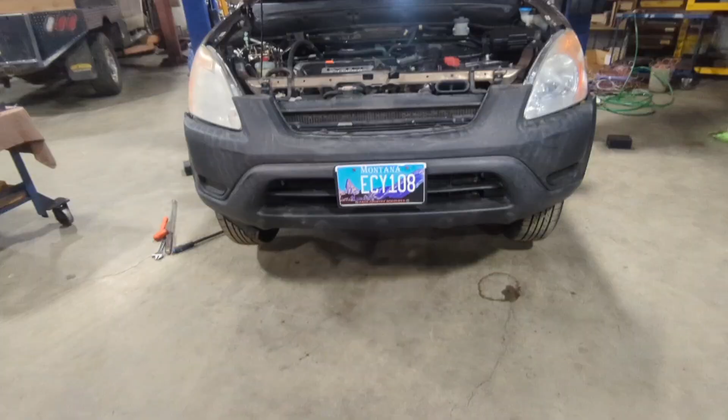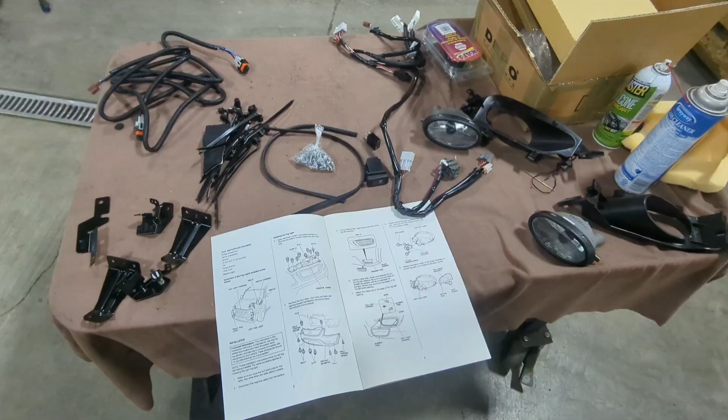Here we have all of the components of the kit ready to go on. This is a Depo kit made to duplicate the aftermarket or the OEM dealer part number. So I popped the bumper off.

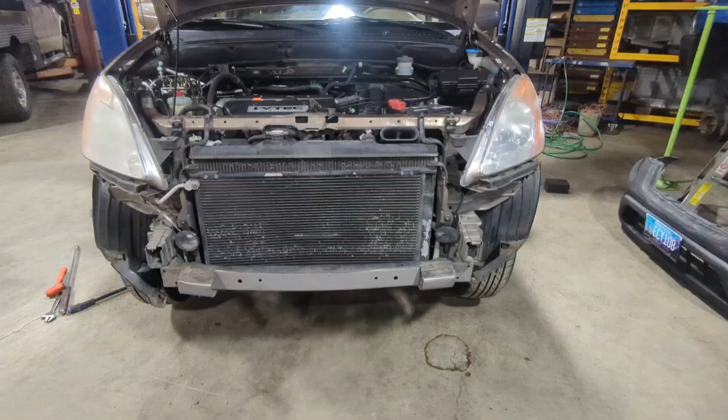There's many videos on how to pull the grill and bumper and all that off. Alright, so here's the piece that I cut out. As you can see, there's 4 tabs around them. The instructions tell you to use a utility knife, and I did. And then I took a Dremel tool and a burr bit and cleaned up all of the edges.

And then I took a micro torch and just heated up the little bits of plastic so that I could wipe them off with my finger, and it essentially sands it perfectly smooth because I just had little bits of the burrs left over, and it made for a nice clean hole. And there's what the back side of it looks like once that's all done.

Nice clean smooth hole cut perfectly to the opening that I can now mount the bracket that goes here and then here for it, and we'll work on installing the fog lights.

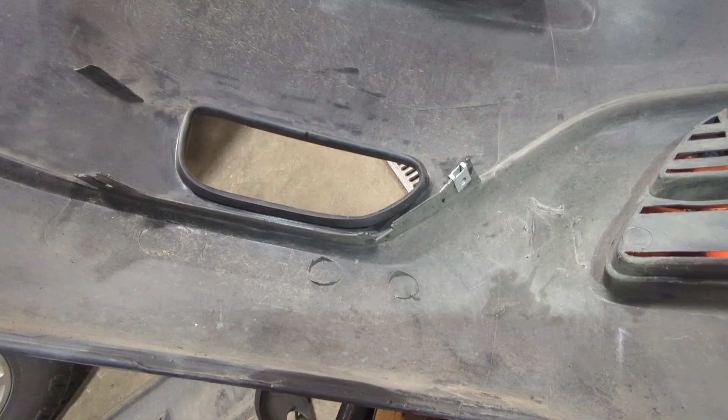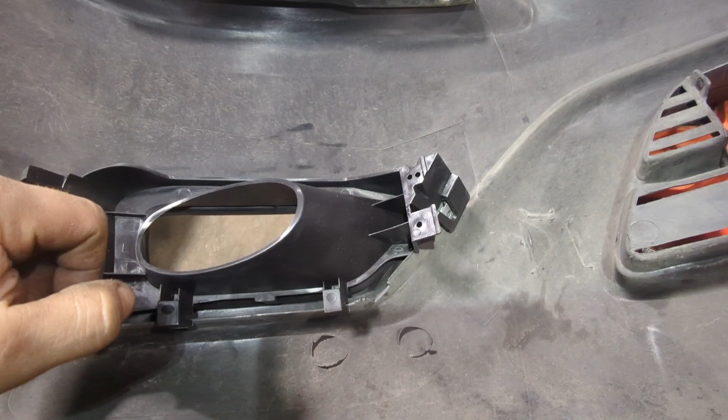Alright, I've got one captured nut there, I've got another one there, and then I've got a captured screw nut, and then this slides in about like so. Got a bolt that goes there, screw that goes in there, rests against here, sets there, and then the fog light's going to actually bolt here, here, and here.

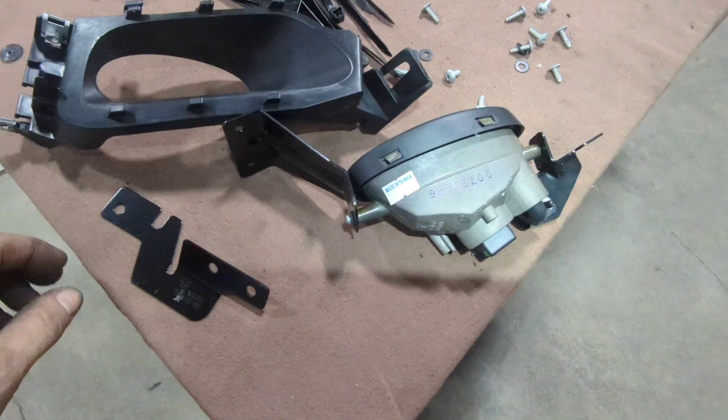This other side's the same way. Those are the bolts I'm using. And if we come over here, you can see I've assembled the fog light with that bracket, that adjuster, and that will set in on the opposite side like this. So, mounts there, mounts there.

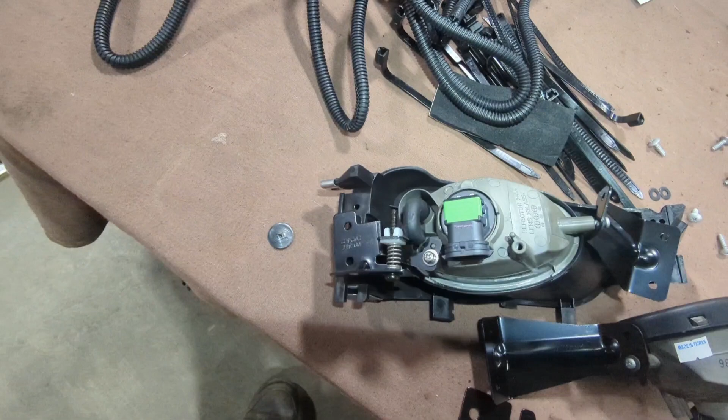Hopefully that gives some clarification. I know it took me a while to figure out what the heck the directions were saying, but I'm excited for these. Hopefully you guys don't make the same mistake I did, which is there's a rubber washer here that needs to have this metal washer on the outside.

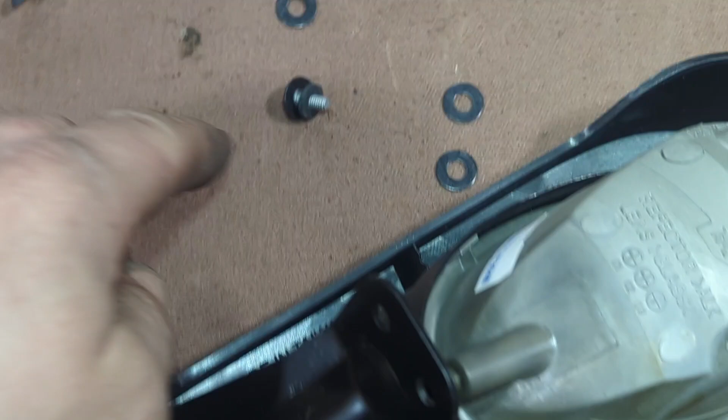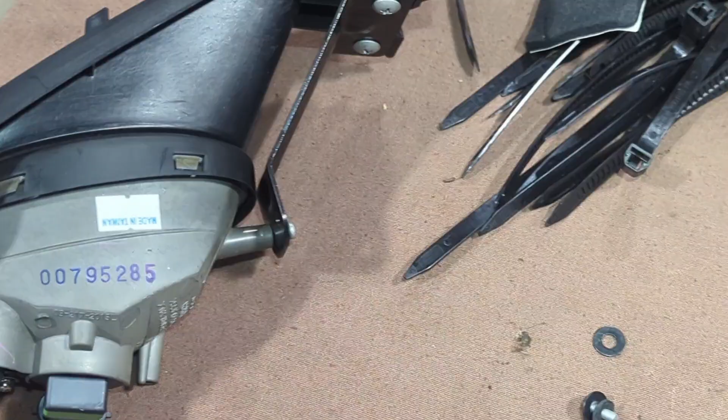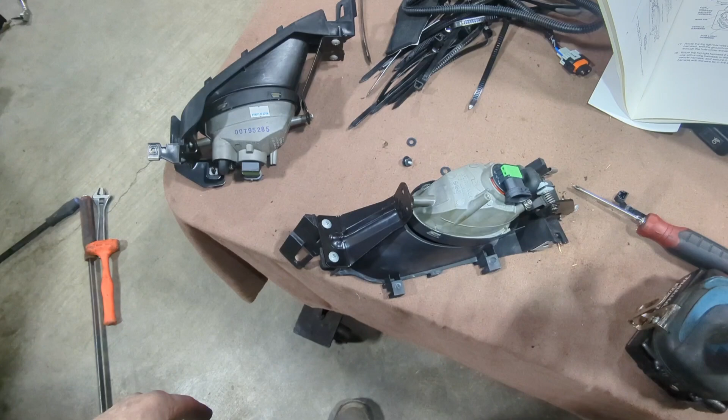It goes right here. There's one that'll focus right there on each side of the light. So there's one right there and one right there. So I was curious what those 4 washers were for. I figured it out when I went to tighten the bolts. But I did wait till the end to tighten all 4 of these on each light and then realized my mistake. Hopefully that clears that up, because it didn't say it in these instructions, despite how good they are.

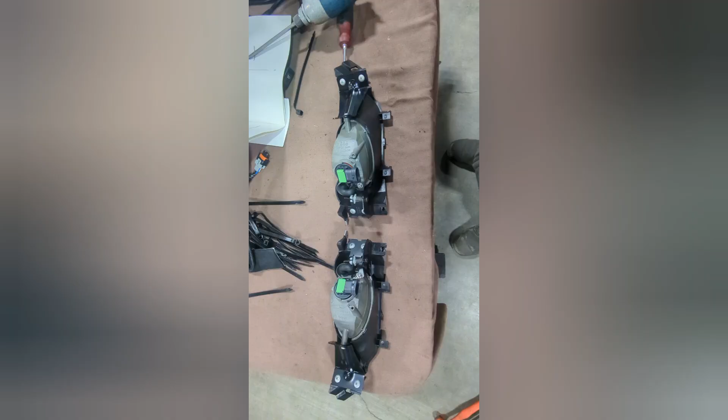And I will post pictures at the end as to what all was in the instructions. Alright, here's what the light modules look like all bolted together. You can see where and how I have bolted them, or screwed them, however you want to say.

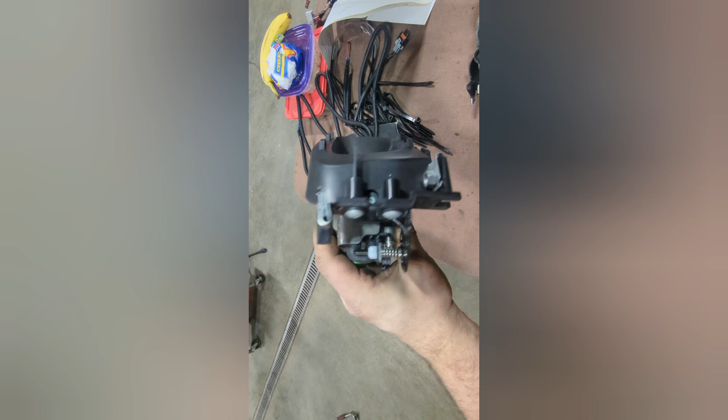But you can still access that screw there with this adjuster bracket there. Comes out looking pretty spiffy. And there's the light module installed.

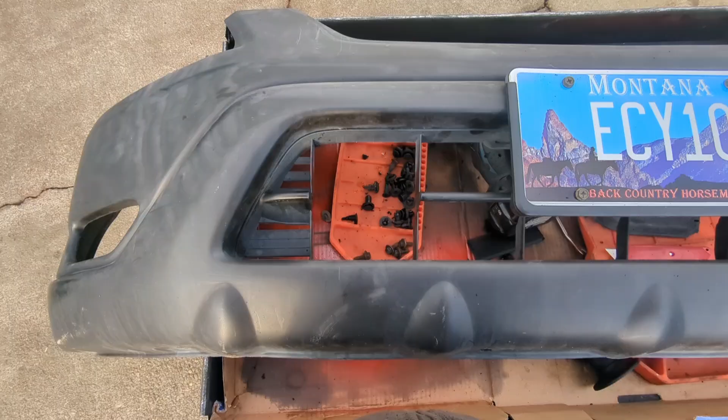Here you can see that I've cut out the part of the bumper here that would normally go here to here in order for me to mount a Diode Dynamics SS3 fog light here and not have the fog light beam pattern be inhibited in any way, because it would have stuck up there.

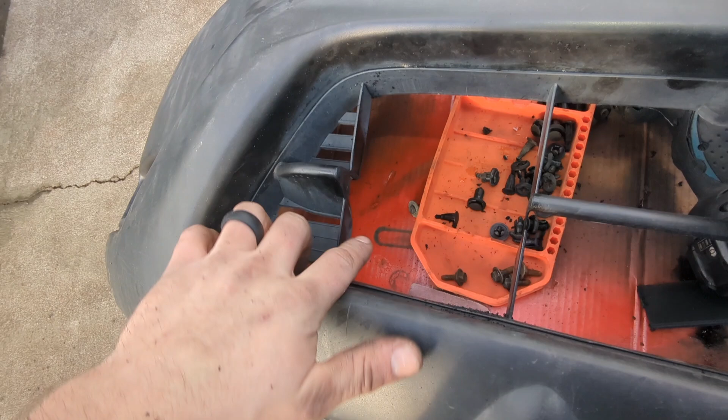So what I did was I took a Dremel and cut this off here, and then I hand sanded it, and then I used a micro torch to smooth it all out to the point where you have to look closely to tell that it wasn't done that way from the factory. Here's the other side as well.

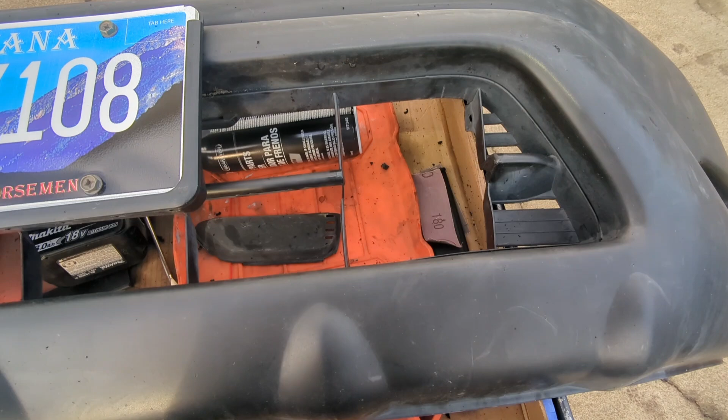And I get that it's not going to be a perfect OEM type look, but I want the light more than I want an OEM look. So this gives me as close to both as I possibly can get.

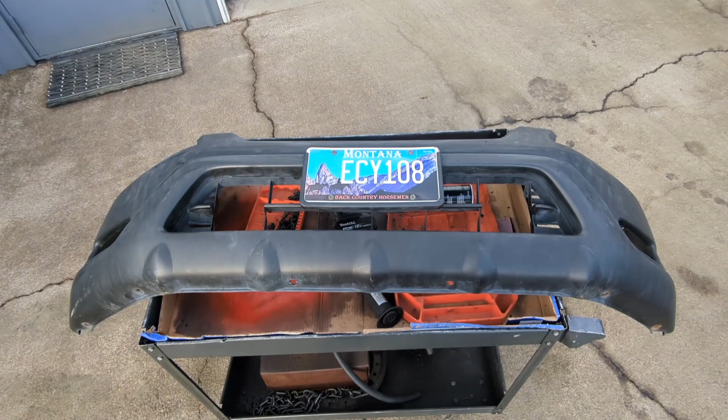Here's how the hole will sit there. And if you look in, you can see a factory pinch weld right there that I'm going to move just to the other side of for mounting my lights.

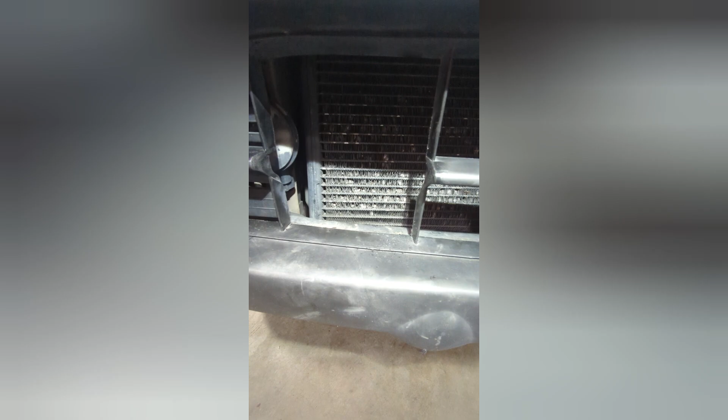The light will sit roughly there, and it's sitting butted up against that factory pinch weld. It will sit roughly like that. If I wanted to center it, I could take and space it up, and I may do that. I haven't decided yet. Both lights are mounted up.

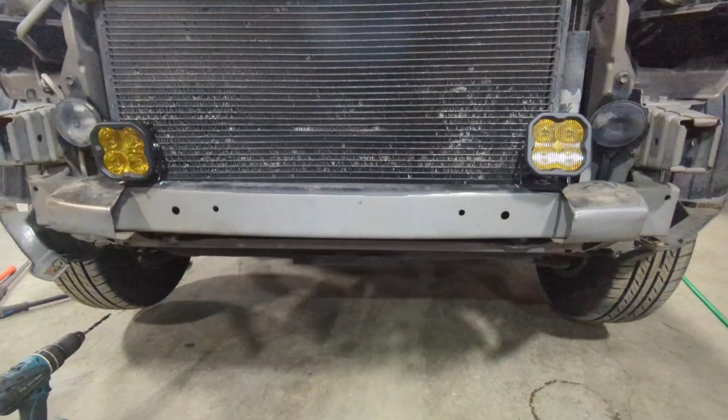Ran into a little bit of an issue in the clearance to the AC condenser. So what I ended up doing was some heat shrink. I just formed the connector so that it would lay proper and give it some structural stability so it wouldn't break over time.

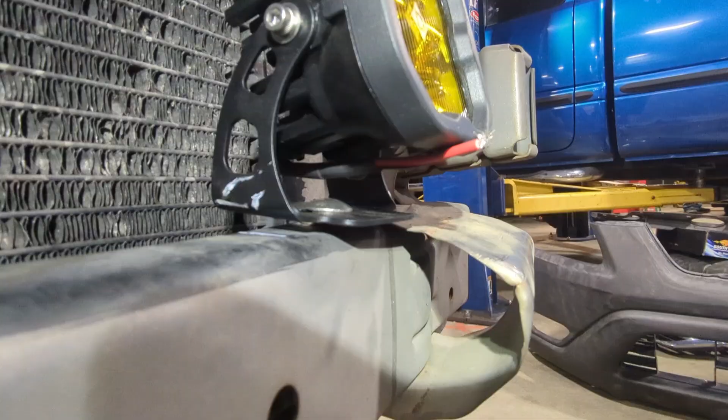Here's how it looks once it's all installed with the connector, and then I will just wire it right here in front of it as the wires come by.

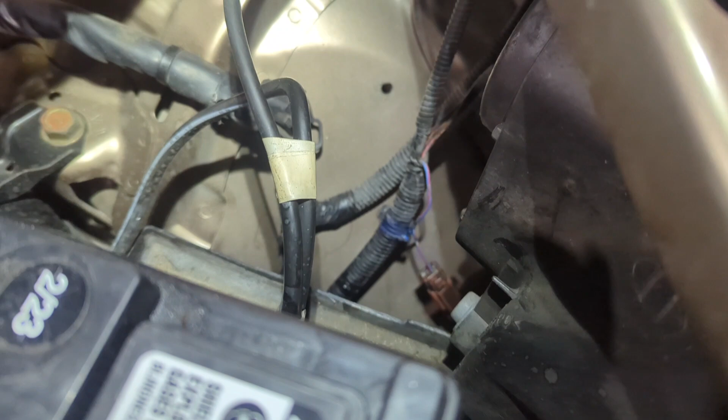Here's where you find the fog light connector from the factory. It's taped up with blue tape, right there, that dirty connector. I've already got the jumper harness plugged into it. With the bumper off, it's real easy to see under there as well. It's right there, you come down through that hole. There's your ground stud, and then your pigtail will live right there, and it'll go across there.

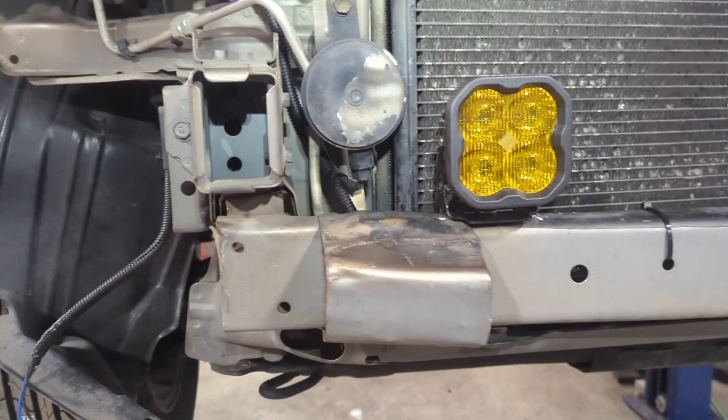Routed the wiring harness as best I could, following as many factory wire harnesses to protect it. Ran it up along there, up through there, come down and out, and ta-da. Alright, there we have the fog lights all installed, bumpers back on, and I'm about to start on the interior stuff.

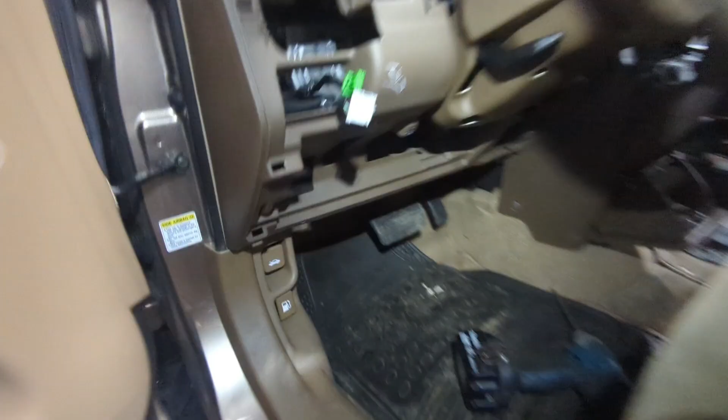Alright, so I removed the under here kick panel as well as the lower valence here, unplugged the two connectors for the cruise and the sunroof. There's a screw right here, there's a screw over there, both Phillips. The rest is just pop tabs that I'll pop out.

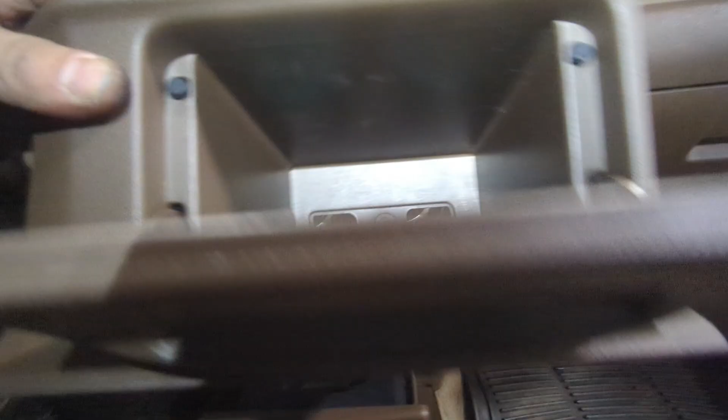Pulled the under kick panel off over there, and then I pulled this tray here. There's one screw in the back, and then you literally just hook your finger in one of those holes and pull it forward. There's several push clips on it. I ended up cutting my finger doing it, but it pops out.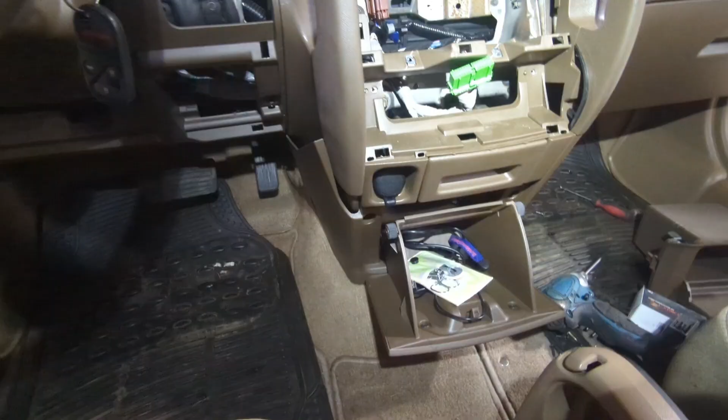Then you pull this, and we'll go from there. Alright, as you can see, I've loosened the push pin down there and popped this side out. There's two screws there and up there, and then there's one screw up under there, one screw here, one screw there. Then this all pops out.

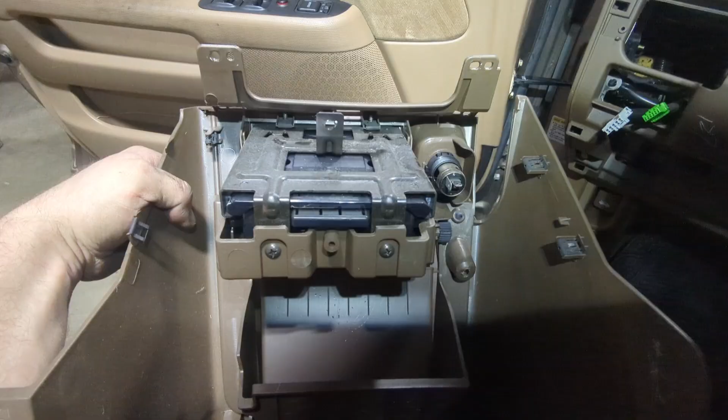There's two screws that held this on and two really tight clips. Had the e-brake pulled to get it out for the HVAC controls. I lied, there was also one screw holding the cup holder in, and then there was the connector for the cigarette lighter as well to get this lower valence out.

There's the fuse box. The next thing you're about to do is plug in the wire for the fog lights to the factory harness, which is down here, back by the HVAC system. It's taped up with a blue wire. You can see I've got it undone. This connector will go into right there.

And there's the red connector, there's the depo kit, and then here I'm about to plug in the factory harness into the depo wiring. Here it is from a different angle. It's coming up right here, and then you're about to unplug this one and plug it into a harness that comes with the depo kit. It has a male and female because you're plugging it in line to that.

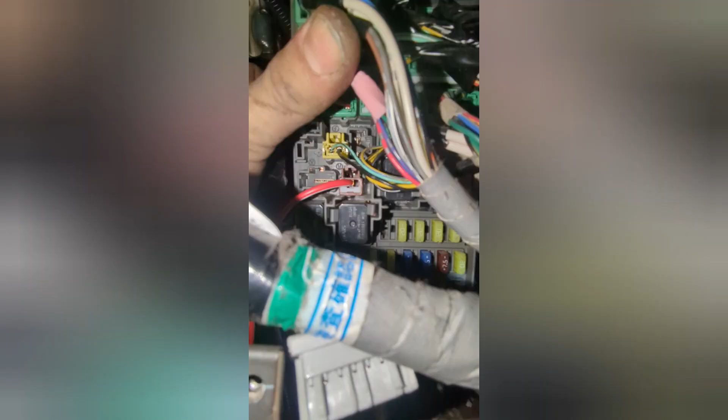I'm sorry I'm changing up directions on you guys on the filming, but this was the only way that I could show you where the red wire connects into the fuse box. Finishing this up, this kicked my butt.

So there's a 5-pin here, this light gray connector right here, and you actually route that down, plug it into the harness, and then the harness has its own one for, I believe it's the headlight or the sunroof, moonroof area. So make sure and do that.

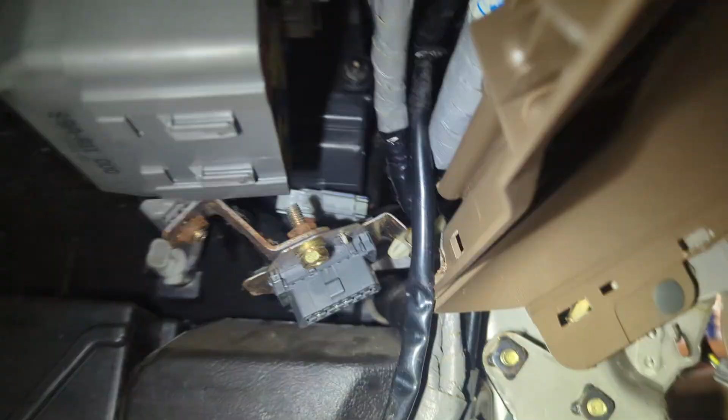And then the other thing is you route the wiring harness underneath there. Up behind that, you've got the single wire connector, and then there's two 10-pin connectors that go up and beyond that. You can see the top of the wiring harness, and I had a heck of a time shoving them into the center console, and then they plug in line right there.

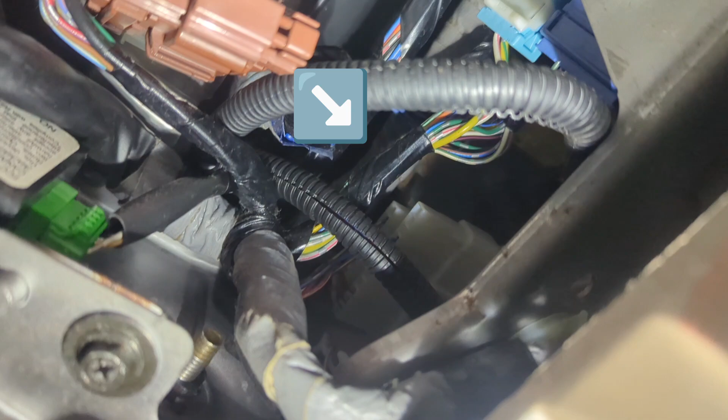You can see that 10-pin connector there, and you can see the other one there. You unplug the factory connector and you put the harness in line there. So, and that is inside the center here. And the directions were not very clear on that.

Well, I just hooked the battery up and tested the fog lights out. They operate properly, everything is good. I did have to repin the relay - one of the pins was not installed correctly from the factory, it was installed in a dead hole. Otherwise, it worked beautifully.

Now I'm just left to put everything back and then button it all up. I just got done aiming the fog lights, both the Diode Dynamics SS3 Sports and the factory type depo ones.

I measured the mid-height of the Diode Dynamics based on their aiming procedure and went 4 inches down. That's the second lower tape line, and I adjusted both the factory type fogs to that and the Diode Dynamics so that it's just one big fog beam of light. And I'm pretty happy with the results. I followed their results and came back 25 feet.

And here's what it looks like. I'm really happy with the light output. It's got a good usable beam of light pattern that's not going to blind anyone.